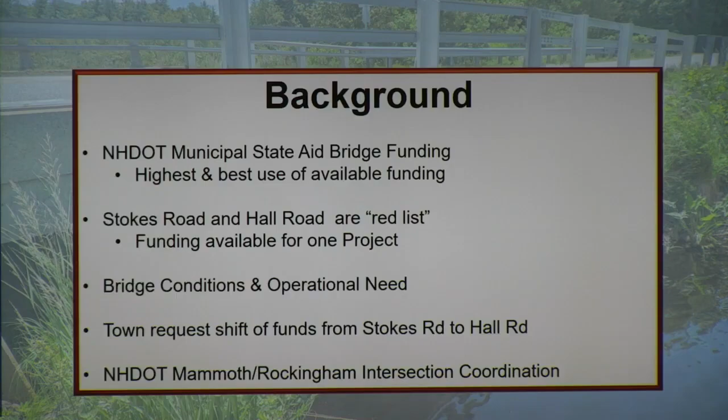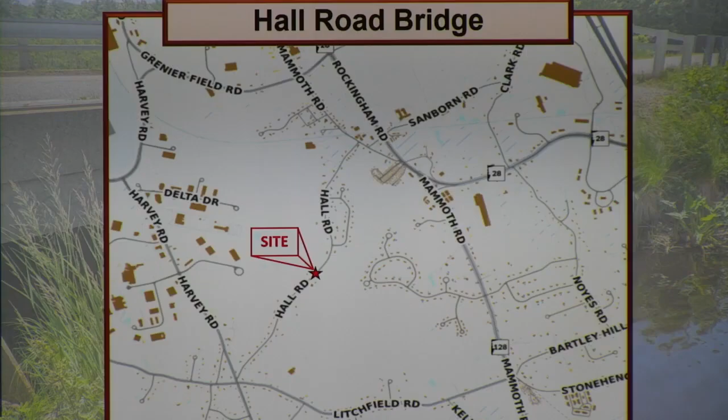All right, so going right into it is the Hall Road Bridge. Here's a locus map of the area. You can see Hall Road is up at the north end of town, and it connects the old village to Harvey Road. Here's a zoom in of the area. You can see there's a big wetland complex that goes on both sides of it. I zoomed into where the actual bridge is. Councilor Combs just mentioned that most people don't even know there's a bridge on Hall Road, and there it is, right there at that stream channel. A couple of arrows up there showing you northeast Mammoth Road and southwest to High Range and Harvey.

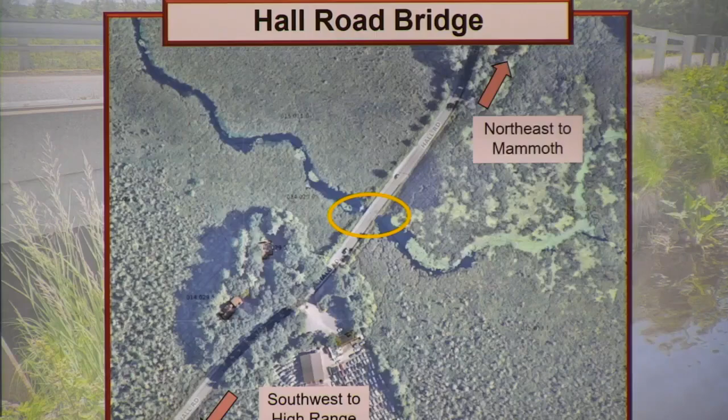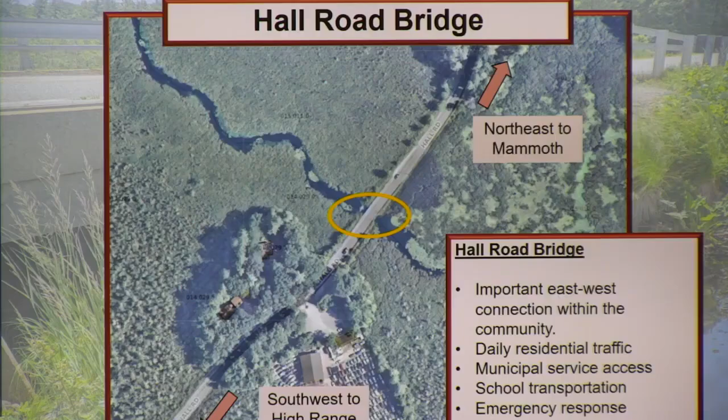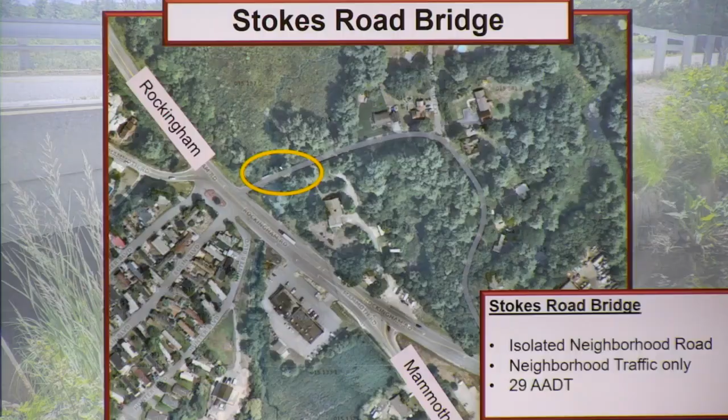All right, bridge condition of Hall Road. The bridge was built in 1974. It's posted at an E2. That means it can handle all loads, but it does exclude certified loads, really heavy stuff. But it can do buses and fire engines as part of that posting.

Tractor trailers? What's that, tractor trailers? Yes, okay, just certified loads. Stuff that needs special permitting to drive on local roads would be excluded from this bridge.

Now, I know sometimes GPS might pop up and say take Hall Road for that driver. I know we may have signs put up for no trucks, but a lot of times they don't seem to follow it. So typically when you have a permitted load, they actually map the route. They look at bridge limitations, bridge height restrictions, neighborhood restrictions, turning movements, when you go in for a certified load permitting application. It's an actual permit to ride that route.

That's good to know for the public. Thank you. Yes, all right.

So again, it's a red list bridge. It's only red listed for the substructure, the part underneath the structure. That means its foundational support is failing, and it's really a function of scour and a foundational support below the abutments, just like it just said.

So right there you get a picture of the bridge, zoomed in. Right at the water level, you can see the underside of the concrete at water level. You shouldn't be able to see that. That is a relatively shallow abutment on that bridge, which is not typical.

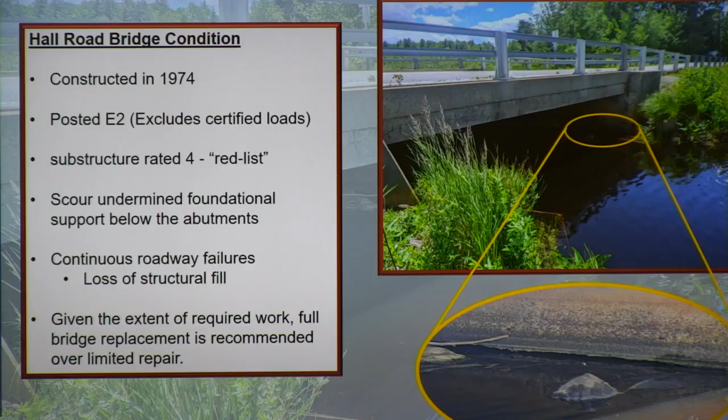Now the roadway also here, as far as condition, is also failing at a regular rate, and I'll go over that in just a second.

Full bridge replacement at this location would be advisable only from the perspective that in order to address this issue, you basically would have to disassemble the bridge, and hey, while you're at it, you might as well replace the bridge. Pulling the deck off, pulling the guardrail off, getting your cofferdams in place. There's a tremendous amount of expense just to get to the abutment, so you might as well spend the money and replace the entire structure.

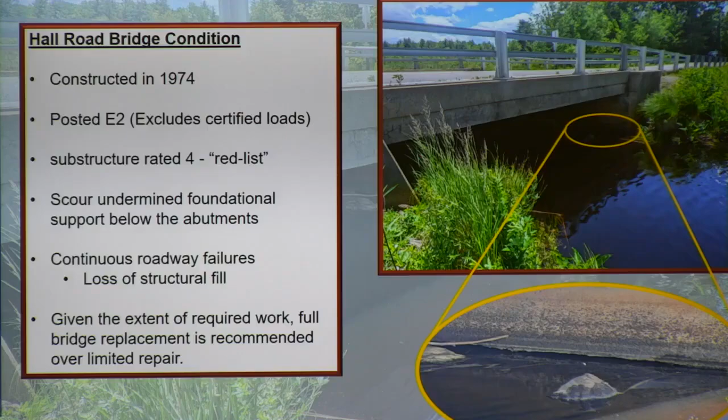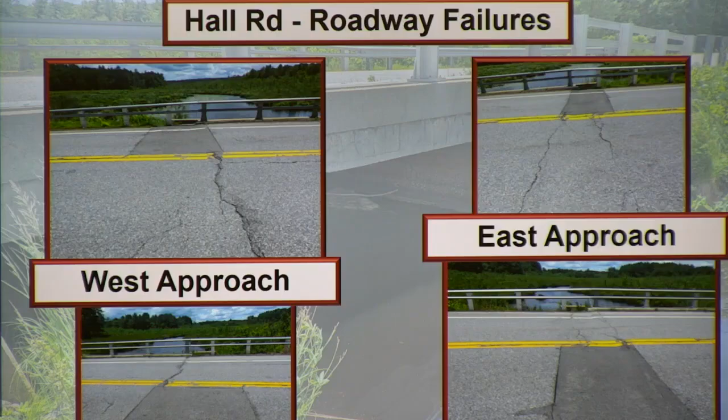All right, so here's what I was talking about a minute ago. Behind the abutments, you have continuous roadway failures. You can see here the west approach and the east approach both have been repaired. You can't quite see the patches here, but within the patches, they also are starting to fail, in addition to the cracks on the rest of the road at each one of the abutment approaches.

All right, so here's a little diagram for you to look at. These are the abutments I was referring to, sitting on I-beam piles, stilts down to the bedrock. You get your stream channel in the middle and your road across the top.

So that little gray oval off to the right-hand side is where the scour is occurring at the base of the abutment. So when that scour occurs, the material under the bridge, you got a little arrow that just showed up there, and that comes out, and that shows you where the exposure of that abutment was in that other picture I showed.

So when that material disappears, guess what happens? The material from the road goes down. So here comes the continued sinking of the road, and the repairs are constant. It's not a static situation, it is a dynamic situation.

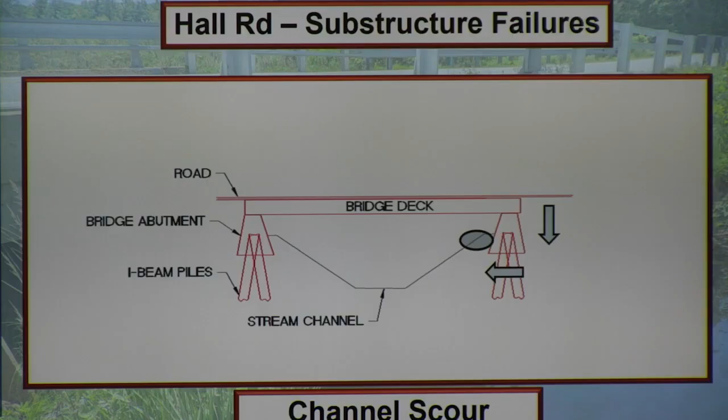All right, so now let's go over to Stokes Road Bridge. It's a much older bridge, built in 1930. It is posted as a 3-ton weight limit. That is a small SU vehicle, basically not loaded.

Plow that road then? Do we plow that road or that section? It is a public road, yes. I guess I meant, do we plow it with that kind of weight limit? Yes, I believe that road is plowed with a 1-ton, so it can easily handle the weight.

So this bridge is actually red listed for 3 categories: substructure, superstructure, and deck. So the foundation, the abutments, and the road surface, the deck itself.

The variety of things that are going wrong with this: we have some wing wall scour, there is concrete spalling, substandard bridge rail, deteriorated curb, by all accounts a much worse bridge than the Hall Road Bridge. Ironically, the road itself is actually in pretty good condition, but again, it's a very low traffic volume road.

All right, so here's a couple of zoom in pictures here. There's our weight limit restriction.

Yeah, substandard guardrail, you can kind of see. Again, similar to the roads, I look at guardrail a lot as well. So there's no standard there.

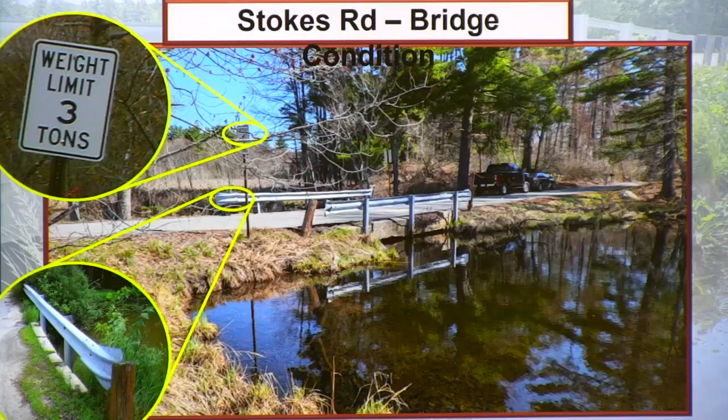All right, so here's the concrete curb. You can see it's basically literally falling apart, and you can also see in this picture how the bridge rail is actually attached to the structure, which is kind of a substandard situation just by itself. And you can see underneath the bridge here, a picture just showed up, and you can see how the spalling of the concrete is happening, and you can see exposed rebar in that last picture.

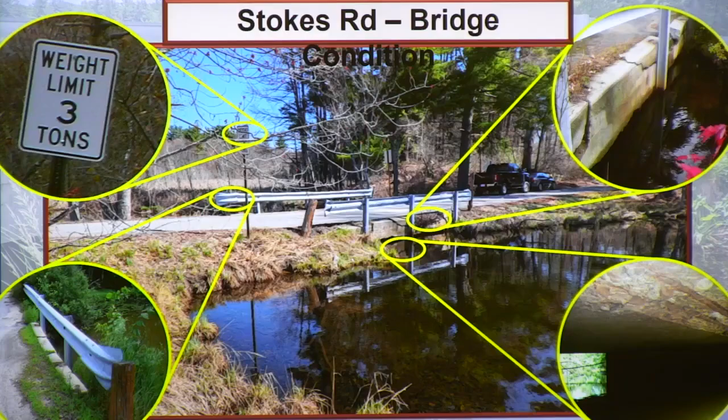All right, so jumping into bridge ratings. I've identified red list a few times, so what does that actually mean? It's a category of 4, a rating of 4, and it means poor. The bridge categories, I believe, go up 1 through 10, and that's pretty low down on the list.

With that in mind, we've identified Hall Road as a much higher priority, even considering the conditions of the bridge itself, from an infrastructure concern, which requires timely action. If Hall Road closes because the bridge fails, that will cause a world of hurt for the entire town, as opposed to Stokes Road, which has two avenues of approach and only eight homes that use that road.

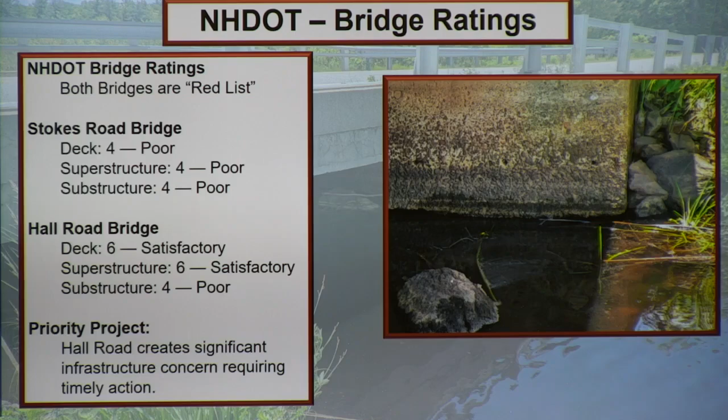Funding. NHDOT Municipal State Aid Bridge. We have an estimate of the Hall Road Bridge at roughly $2 million. The town's 20% match on that would be $400,000. That includes engineering, study, construction, oversight, as well as permitting. The town currently has that money in existing state aid bridge block funding. That funding can only be used for bridges, and again, we currently have that money, so there's no tax impact on this project.

So again, the principal function for me sitting in front of you here tonight is the request that I be allowed to ask the state to shift the money from Stokes Road Bridge to the Hall Road Bridge. We've identified, as a community, that we have a responsibility to spend wisely with the limited resources we have. So what's the highest and best use of the NHDOT funding provided to us? You take into consideration things like public safety, infrastructure resiliency, long-term transportation planning, and responsible use of local, state, and federal resources.

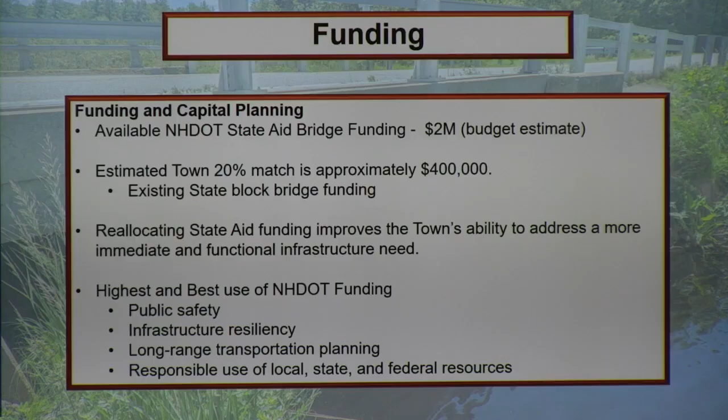So with that being said, I want to jump back to infrastructure resiliency. If Hall Road fails and it closes, the impact on emergency services, public works services, the residents, and the detour route—if you can go back to the locus map—is fairly significant on Hall Road, and it has a fairly significant impact to the community on the north end of town.

Cost of the Stokes Bridge as well? I do, it's in a separate letter. It's about 1.8, and by contrast the Hall Road was at 2, and DOT will up the funding based on construction end estimates. All right, so the last thing I wanted...

Better bang for our buck for only $200,000 more. You said it's 1.8 for Stokes and $2 million for Hall Road? Yes, Hall, yes. Right, is about 200,000 more. Yes. Right, so better bang for our buck. Certainly, when you consider the impact on the community, absolutely.

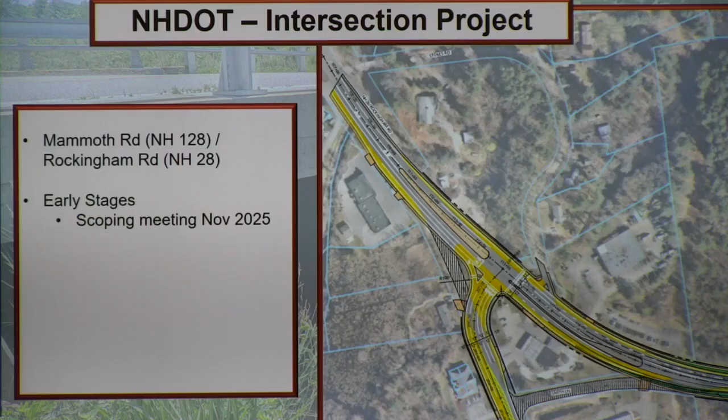All right, so the last thing I wanted to talk about is the impact of the Mammoth Road Route 28 intersection project on Stokes Road itself. That project is in its infancy stages—we only just had a scoping meeting in November of 2025. They're actively moving forward with the next stages, so this diagram shown in this picture is pretty much all that we have thus far.

Under the guise of this particular project, the intersection will be reconfigured to a 90-degree approach. You can see that in the yellow on that diagram.

Next, the cut-through road, Smith Lane, would actually be removed from existence, so that it's no longer a cut-through road. Will that become a light?

That was the next point I was going to make, that the reconfiguration would also support a signal, and the Stokes Road southern entrance, or eastern entrance depending on how you're looking at it, would be looked at for reconfiguration and realignment to come into the actual signalized intersection that would be proposed. So you can see the realignment just pops into the picture there.

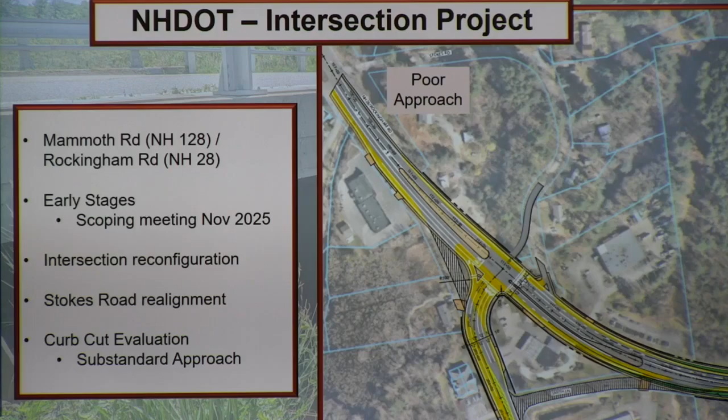You can see what that might look like if Stokes Road was realigned. The second piece of this project is they will look at the northern intersection, which currently has a pretty substandard approach. It's very steep approaching Rockingham Road, and it's not entirely safe for traffic pulling out onto Rockingham Road, given the steepness and the speed of traffic in that area.

My recommendation, DPW's recommendation, is to reallocate the state aid bridge program funding from Stokes Road over to Hall Road. It provides a greater long-term public benefit and transportation utility.

Stokes Road curb cuts are actively being assessed with the Mammoth Road intersection project, so we don't know the status of what's going to happen over at Stokes Road. There is a world where the northern curb cut is closed by NHDOT over on Stokes Road. If that northern curb cut is closed, that bridge is no longer in use.

Again, the funding transfer is a prudent, responsible capital planning adjustment, but the most important thing to identify with Stokes Road itself is that it will remain in the bridge program asset inventory. So it doesn't pull it off of the equation.

Should funding come about and should that curb cut not be impacted with the intersection project, the opportunity may arise in the future to do something with that road. And further, if that bridge does get closed due to condition, there's still a second avenue of exit for that neighborhood until a solution can be brought into play.

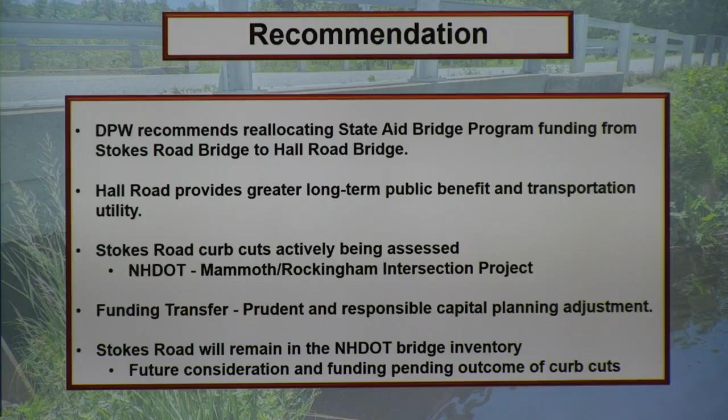So again, not only do you have a much smaller impact on the town, you have an alternate means of access if by chance that road were to happen to close. All right, so that's it for the gist of the presentation. Is there anything I can answer?

Jim, Ed, I saw you first. Go ahead. How long is Stokes Road coming out from the potential new intersection all the way to the furthest house before you get to the bridge? I actually did not take that dimension.

I don't know. Just wondering, in case in the future DOT decides to close that northern part of Stokes Road and say the bridge isn't safe, we don't want to put money towards it, we're just going to close it off. I want to make sure, what is our distance, because we're supposed to have, I believe, 1,200 feet for a cul-de-sac to go in on a road.

So I want to know, are we still following our same standards with the town or not? I don't know the answer as far as fire access goes. We're in the infancy stages. We'll work that through with the DOT Right-of-Way Bureau, and try to work through some of the intricacies of our own ordinances to make sure, as much as possible, that we can comply with them.

And I guess the other piece of this is, have the people on Stokes Road and Hall Road been made aware that there might be funding for both, and we were going to be choosing one or not? I did send out a neighborhood notification to the residents of Stokes Road in advance of this meeting to let them know what was happening as far as me being here in front of the council and requesting that the funding be shifted.